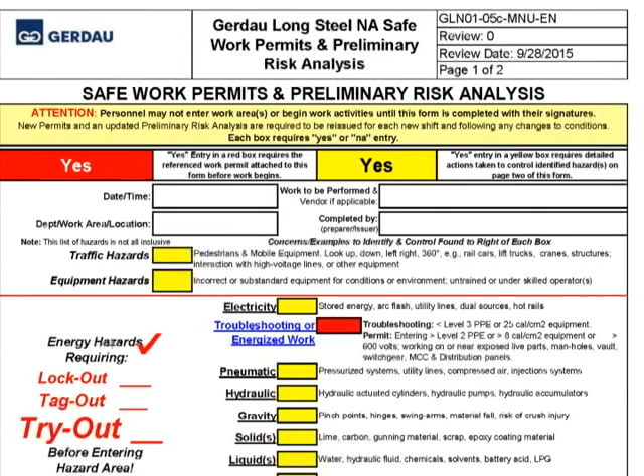During the hazard identification process, consider the tasks people will be performing and whether these tasks could impact others. Do the following hazards exist? Traffic hazards: look up, down, 360 around to identify pedestrian hazards or risk to others. Pedestrian safety is a key focus for Gerdau. Contractors are required to remain within the designated walkways whenever walking within a Gerdau facility.

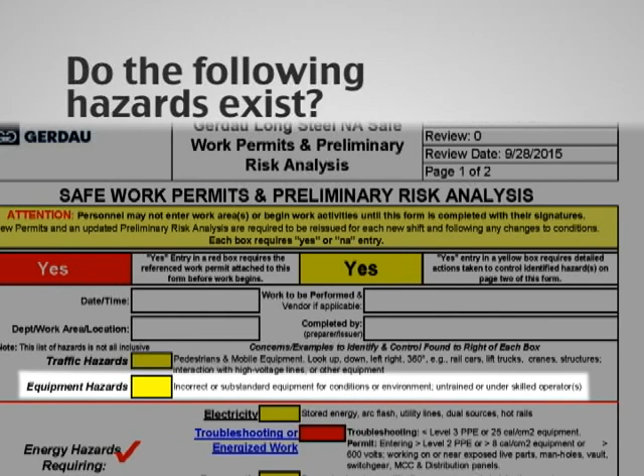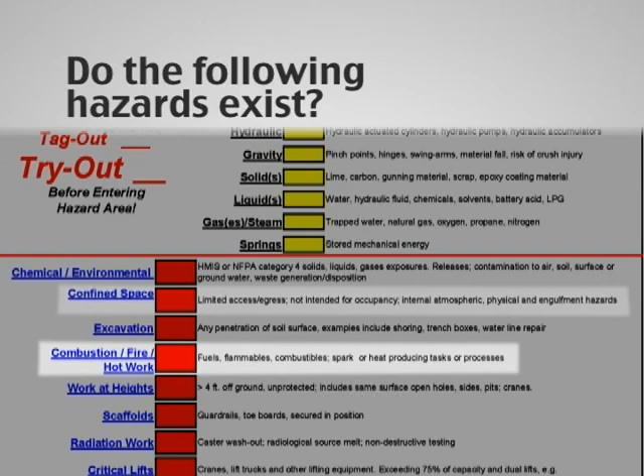Equipment hazards: is the equipment in good working order, compliant to Gerdau standards, and are all operators properly trained? Energy hazards, including electricity, pneumatic, hydraulic, gravity, steam heat, springs, and fuel. Chemical hazards, confined space hazards, fire hazards, and fall hazards.

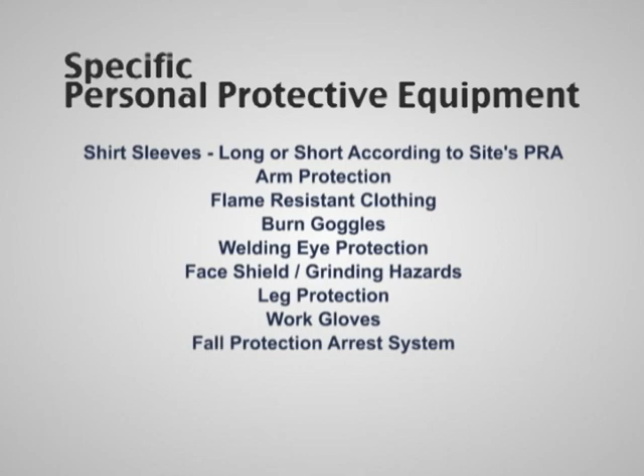We next review the specific PPE requirements for the task: blue hard hat with chin strap, electrician's gloves, safety boots. The styles may be specific; check with the facility for their requirements. Sealed eyewear, shirt sleeves, arm protection, flame-resistant clothing, burn goggles, welding eye protection, face shield for grinding hazards, leg protection, work gloves, fall protection arrest system including fall harness and lanyard.

Dust mask and respirator. The PRA is next reviewed by the contractor and Gerdau persons in charge. Everyone understands their safe work requirements. Everyone knows what to do. Everyone has PPE required. Is it used?

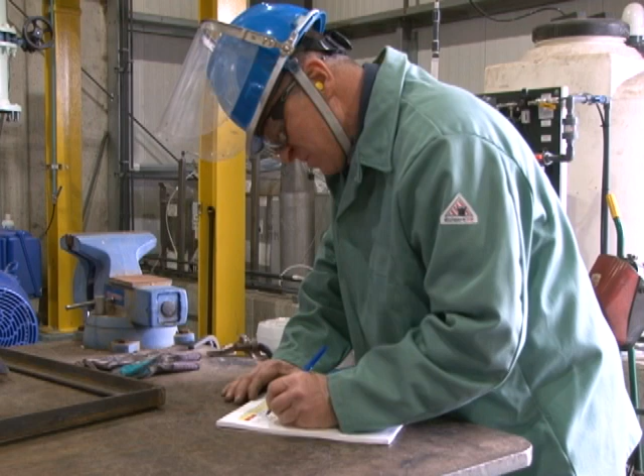Based on the above information, we can now complete the specifics for the PRA. We list the steps for each task individually. Next, for each step, we list its specific hazard or hazards and determine if a work permit is required for the hazard.

We identify other actions to control the hazard and then determine who is responsible for the control. Implementation of the control must be documented before proceeding. The PRA is completed, reviewed, reissued daily, and signed by all parties involved, including contractors, subcontractors, and Gerdau employees.

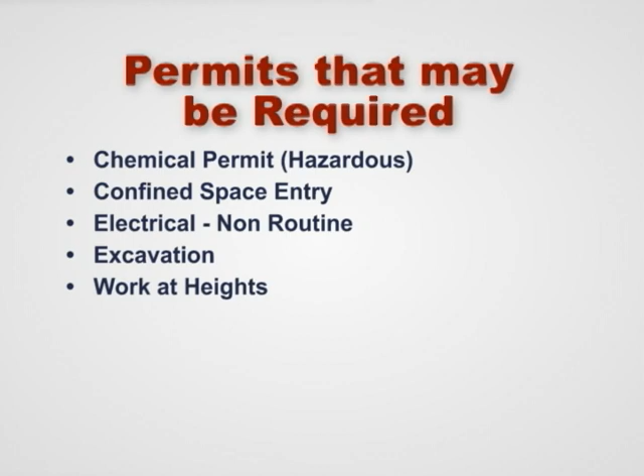Examples of permits potentially required are chemical permit for hazardous chemicals, confined space entry permit, electrical non-routine, excavation permit, work at heights permit, hot work permit, scaffolding, mobile crane or heavy lift permit, and radiation permit.

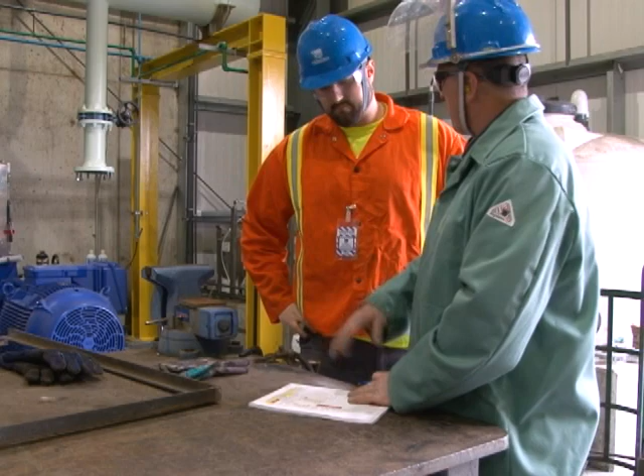The purpose of this process is to ensure that everyone understands the risks inherent in the job and have planned adequate safeguards to avoid accidents and injury before any work takes place. This requires communication among all parties on the job, especially the Gerdau and contractor project managers.

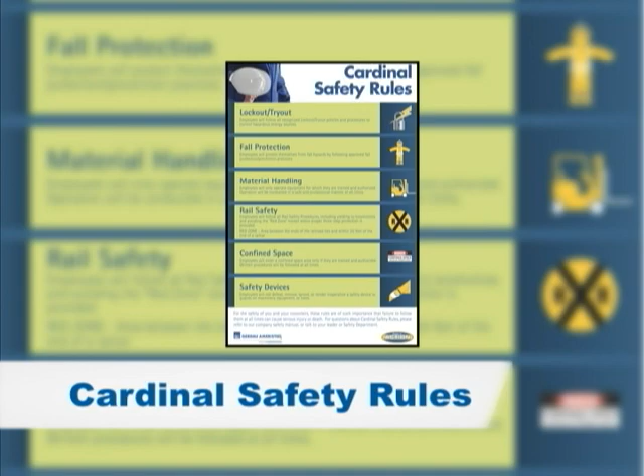Gerdau feels so strongly about the importance of certain policies in keeping you safe that they have designated those as cardinal safety rules. There is zero tolerance for serious and/or intentional violations of our cardinal safety rules.

Violation of a cardinal safety rule will result in the immediate removal of the contractor employee. Project engineer or project coordinator and location safety manager will determine appropriate sanctions to include one of the following: warning letter, notice of suspension, company probation, company suspension, company barring.

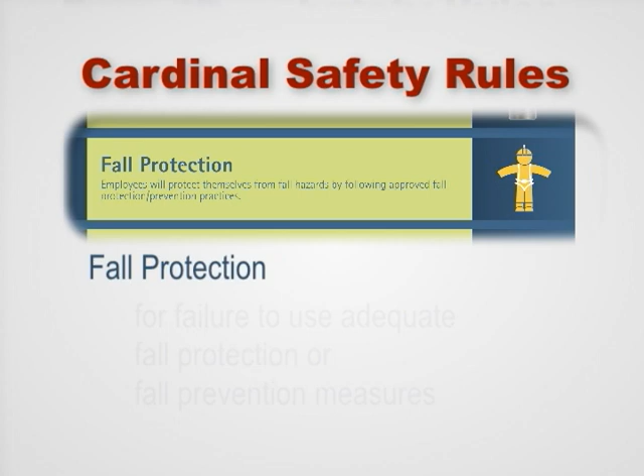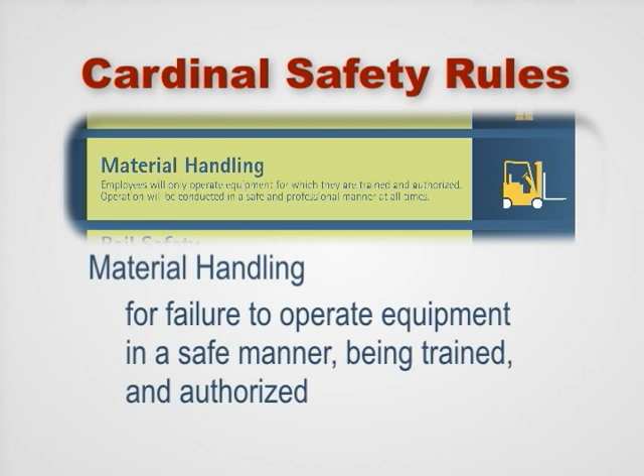Cardinal safety rules include lockout-tryout for failure to follow lockout-tryout procedures, fall protection for failure to use adequate fall protection or fall prevention measures, material handling for failure to operate equipment in a safe manner, being trained and authorized, rail safety for failure to follow rail safety procedures, stopping for locomotives, and violating the red zone.

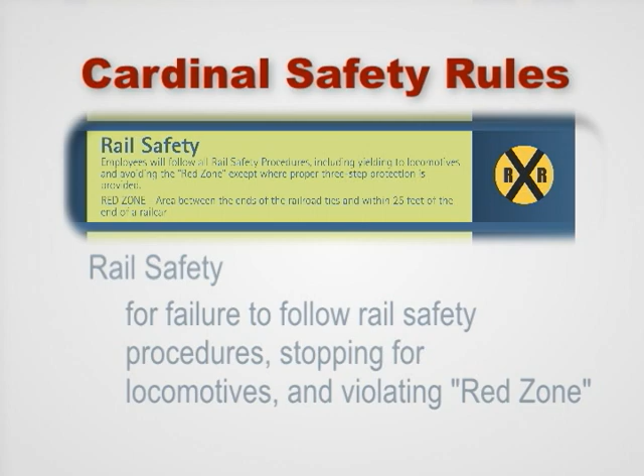Confined space for failure to follow confined space procedures. Safety devices for failure to follow lockout, tagout, tryout for defeating, ignoring, or rendering inoperable safety devices.

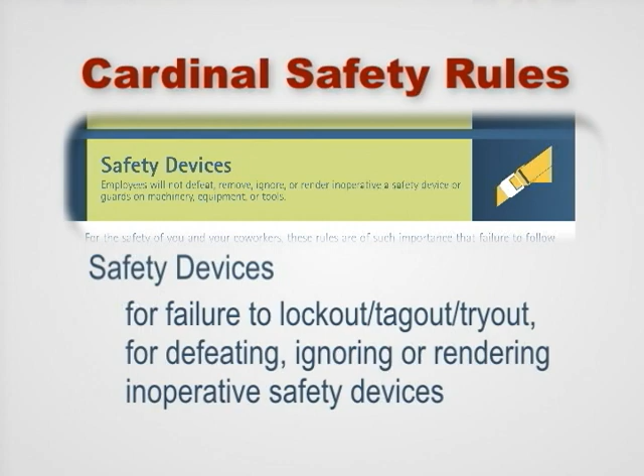General safety rules include: follow all standards, instructions, signs, warnings, and rules. Always ask if you are unsure if something is unsafe. Only trained and authorized employees may operate equipment or enter restricted areas. Only perform tasks after all risks have been adequately evaluated and controlled.

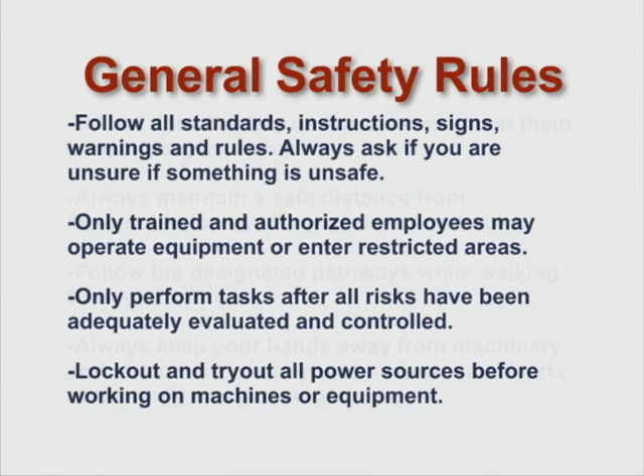Lock out and try out all power sources before working on machines or equipment. Do not defeat safety devices and maintain them in operating condition. Always maintain a safe distance from suspended loads, lifting devices, and hooks.

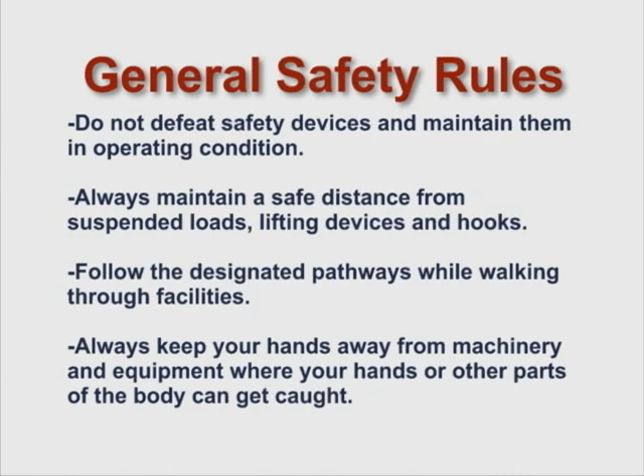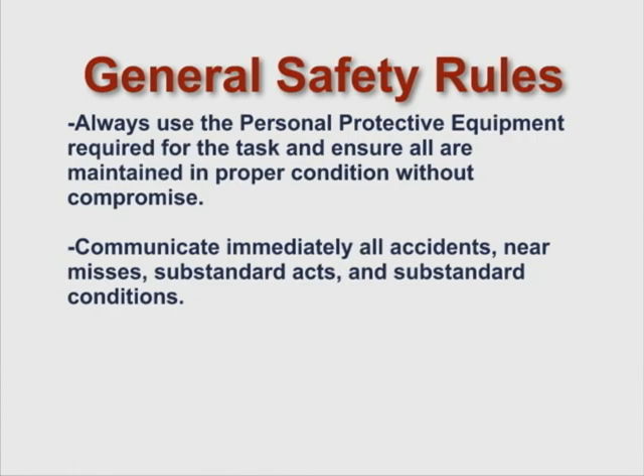Follow the designated pathways while walking through facilities. Always keep your hands away from machinery and equipment where your hands or other parts of your body can get caught. Always use the personal protective equipment required for the task and ensure all are maintained in proper condition without compromise. Communicate immediately all accidents, near misses, substandard acts, and substandard conditions.

Additional general rules: Personnel may not work for more than 16 consecutive hours. Personnel must have at least 8 hours of rest time between when the contractor stops working and when they report for the next shift. Personnel may not utilize cell phones, music devices, etc.

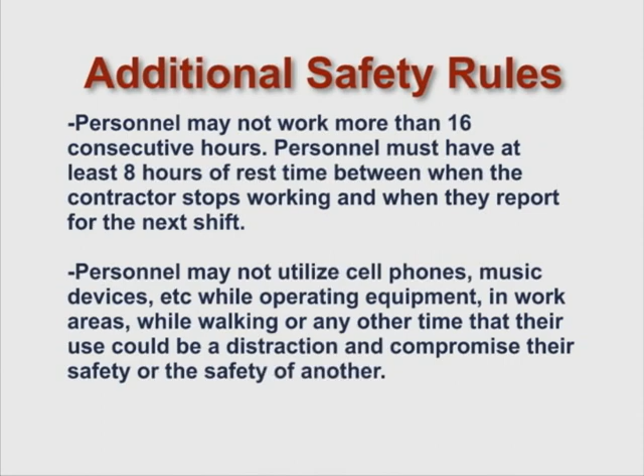while operating equipment, in work areas, while walking, or any other time that their use could be a distraction and compromise their safety or the safety of another. Personnel must be medically fit for duty when arriving on site.

Never enter areas outside of your designated approved work area. Remain in your work area. Taking pictures or videos is not permitted without Gerdau's permission.

Maintenance on contractor vehicles while on Gerdau property is outside of the SOW and not permitted. Scrapyard and slag operations areas are off-limits unless escorted by your Gerdau contact. Never work alone.

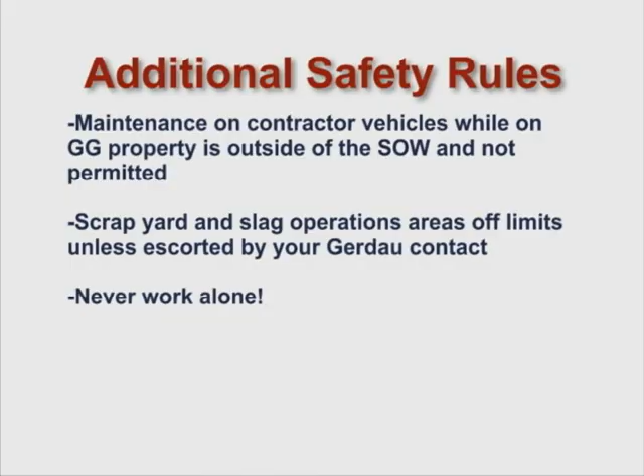Unless you have been authorized by your Gerdau site contact, do not make any connection to operating electrical, gas, oxygen, water, pneumatic, hydraulic, or process lines. Do not turn on or off any of these utility lines.

Gerdau has a lockout, tagout, tryout policy to protect you from the accidental startup of machinery. After the completion of the daily project safety review, all contractors and subcontractors must proceed to the affected area to complete the necessary equipment lockouts using the Gerdau-provided lockout-tryout procedure.

All contractor employees are required to participate in this process, and each must individually apply their lock or locks to the equipment or group lockbox. Always review the control of kinetic energy in motion and potential energy stored with your Gerdau representatives.

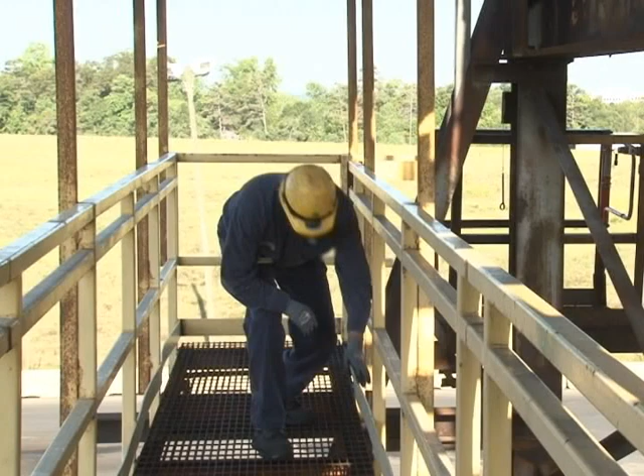Anytime you must place your head, hand, or any other part of your body in a position where you are at risk of being injured by moving or energized equipment, or any time you are required to remove or bypass a guard or other safety devices, you must contact your Gerdau representative to coordinate the lockout, tagout, tryout procedure.

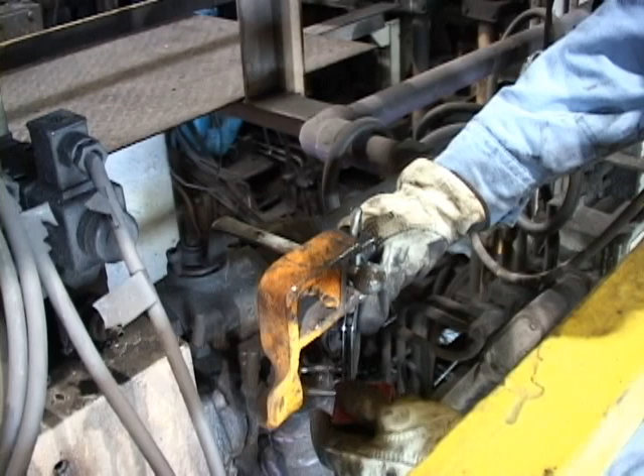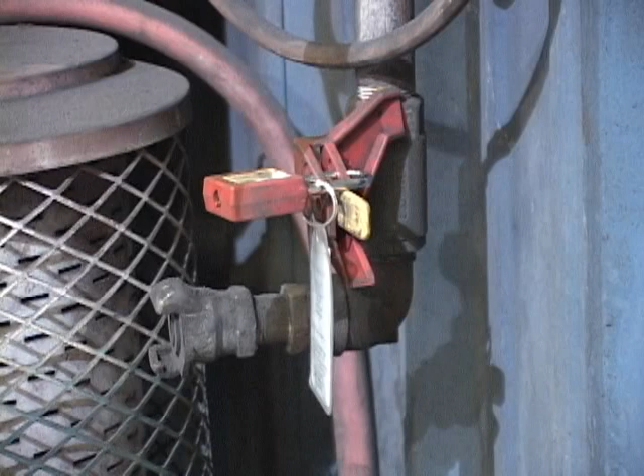This procedure is designed to make sure every source of energy has been disabled, that every employee applies his lock, and that it cannot be re-energized until every employee involved unlocks it. Each lock must be standardized by the contractor and contain a label or tag identifying the contractor firm name and

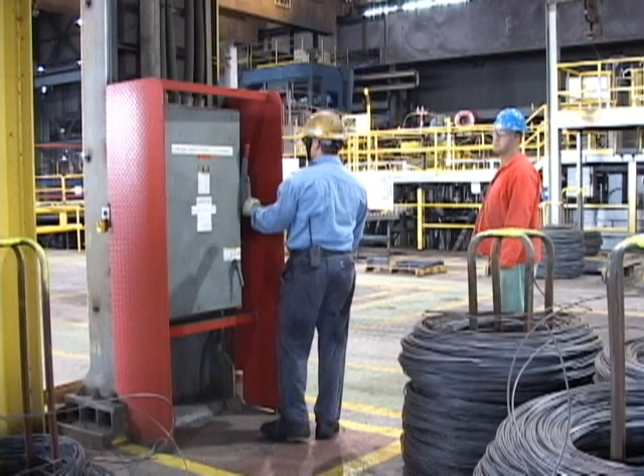employee's name who applied the lock. Contractors are not authorized to shut down, stop, or de-energize any plant equipment or machinery. A qualified Gerdau employee must do this unless an imminent danger situation exists.

If you see someone's lock on a piece of equipment, leave it alone. That person is the only one allowed to remove that lock. You must receive formal training and certification on lockout, tagout, tryout before participating in this program. This training is provided by your employer.

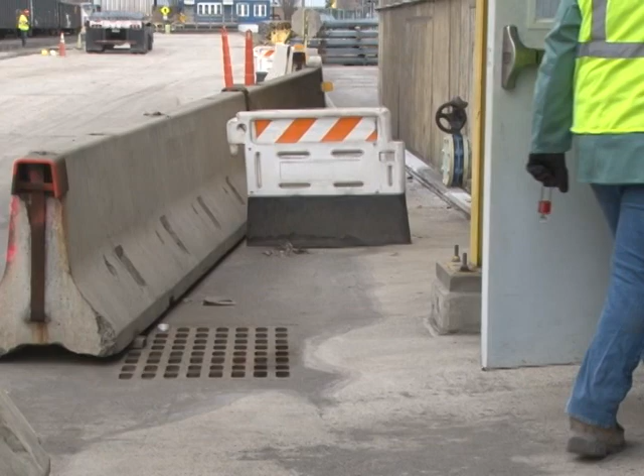Do not leave the site with your lock still in place. This could cause tremendous inconvenience for your company and Gerdau if we had to track you down to start up the machine.

It is Gerdau's policy that you wear fall protection equipment whenever you climb 4 feet above the ground, unless the area is surrounded by a permanent stationary deck with properly equipped guardrails, or you work in a man lift or scissor lift, or anytime you work off a ladder over 4 feet above the ground and you are not able to maintain a 3-point contact, or when you work over 4 feet deep pits or basement openings.

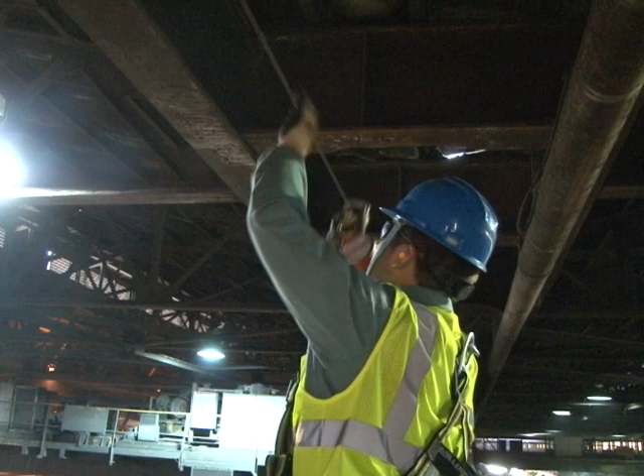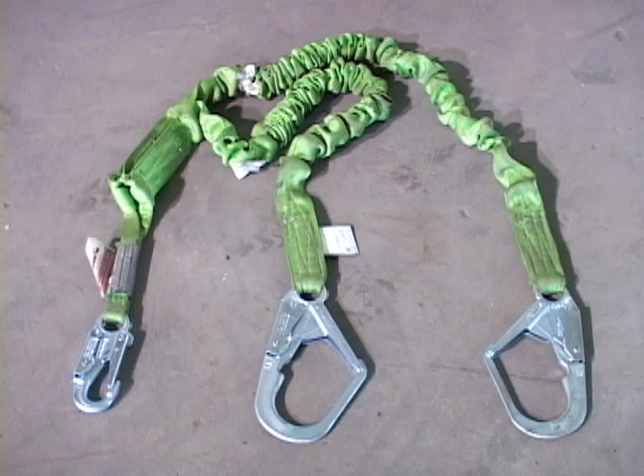Acceptable fall protection includes a full body harness and shock-absorbing lanyards or self-retracting lifelines, referred to as SRLs. The lanyards must be tied off to a structure capable of supporting 5,000 pounds for each person attached. 100% tie-off is mandatory. You may be required to wear a dual lanyard. Fall protection belts may be used for fall restraint.

The use of forklifts as man lifts is strictly forbidden unless properly fitted with an approved engineered man basket. Contractor personnel must receive adequate training before working at heights. Gerdau does not provide either the equipment or the training for implementing any contractor's work at heights program that may be required to perform the contracted work. Both are the sole responsibility of the contractor.

You must be adequately trained and receive certification to use mobile equipment. Inspect and document your fork truck safety devices and all operational systems prior to use each shift.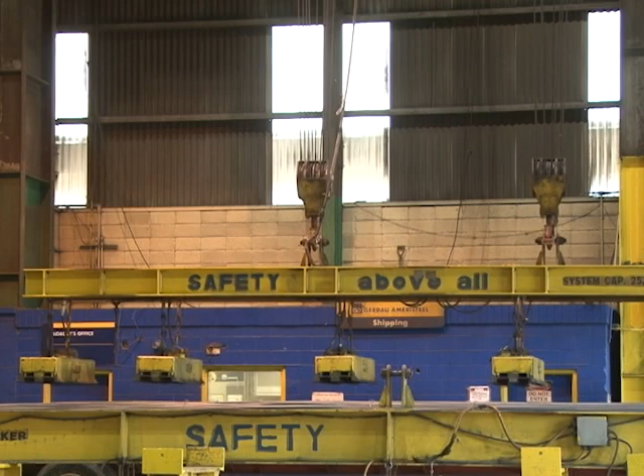You must be trained and qualified to operate a crane by your employer. Do not stand or walk under loads suspended from cranes or the empty hook of a crane. Listen for the siren, horn, bell, or other signaling devices that signal the approach of a crane. Keep all parts of the body clear of lifts while tension is being applied.

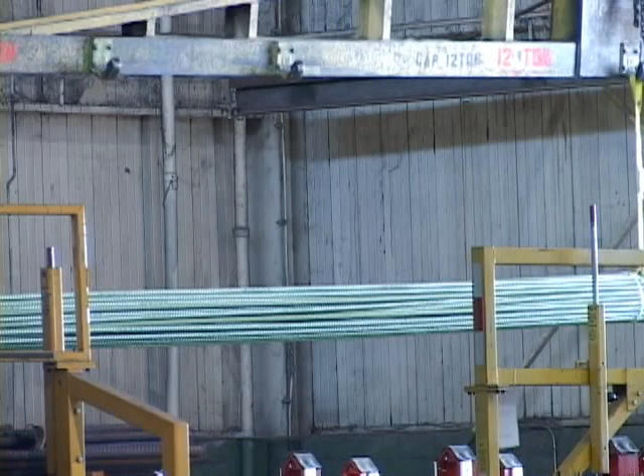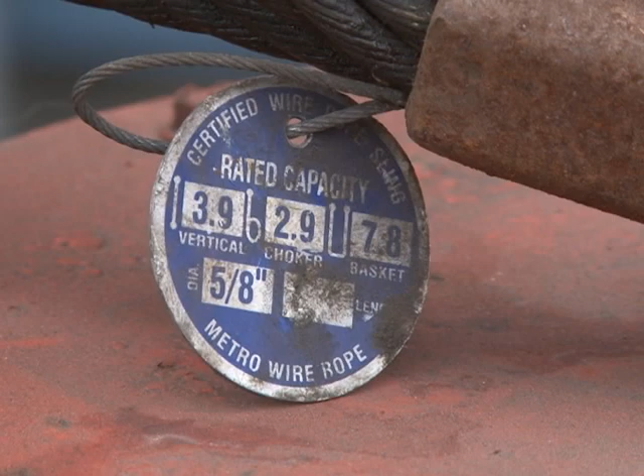All cranes used on site must be inspected regularly, including daily operator pre-use inspections and annual inspections. The crane must be certified to operate. All rigging equipment must have permanently affixed identification from the manufacturer and be inspected prior to each use. You must be both trained and authorized by your employer in safe rigging practices.

Safe rigging practices shall be adhered to at all times. Always be certain of the weight of the load prior to performing any lifting operations.

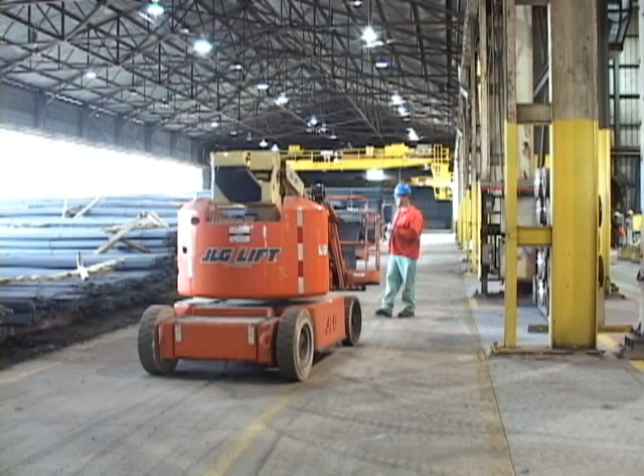You must be adequately trained to use a boom lift or scissor lift. You must be tied off to the floor or mid-rail anchor point while wearing a self-retractable lanyard before performing work. You must lock out the bay if there is potential contact with the crane, hot rails, or below-the-hook devices.

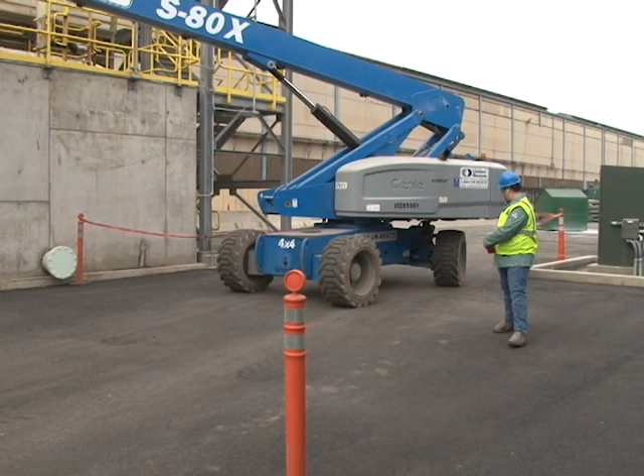Inspect and document your aerial equipment safety devices and all operational systems prior to use each shift. Use of an aerial lift at a Gerdau facility requires a spotter to escort the lift during movement. The spotter must always be visible to the equipment operator and provide assistance with clearances and pedestrians that may be in the equipment's path. When the aerial lift is stationary, the area below must be marked with cones and/or caution tape to prevent pedestrians from traveling under the work area.

Aerial lifts can be used directly over pedestrian pathways, provided the necessary precautions are taken to close off the walkway and provide a temporary, safe pedestrian route.

Riding on locomotives, rail cars, or other transportation equipment is prohibited except when required by your job. Do not crawl or climb over or under cars. Only drive across railroads at the crossings provided for that purpose, and only after coming to a complete stop.

Always park vehicles or equipment a minimum distance of 10 feet out from the center line of any railroad track. Only walk across railroad at designated walkways. When crossing a track with standing cars, maintain a minimum of 25 feet clearance from the end of the car in case of sudden movement.

Contractor employees will not defeat, remove, ignore, or render inoperative a safety device or guards on machinery, equipment, or tools.

Contractors cannot perform any work for Gerdau unless a PRA and associated permits have been completed. All employees working on the project must review and sign the PRA. Then it must remain with the persons conducting the work.

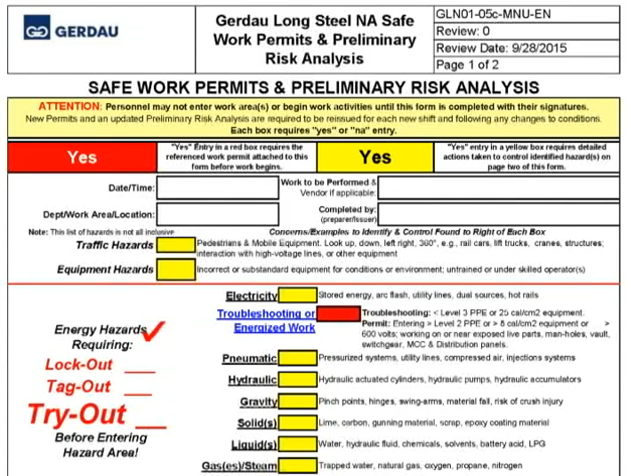If work task hazards or scope change, stop work and meet with your Gerdau contact to update and discuss with the crew. Completing the PRA and associated permits require a thorough analysis of all of the hazards inherent in the job at hand. The contractor is asked to identify any hazards that may become present, including exposed electricity, excavations, toxic substances, and poisonous atmospheres.

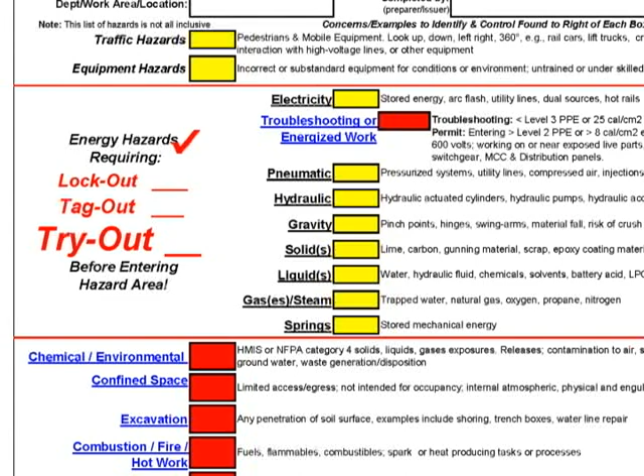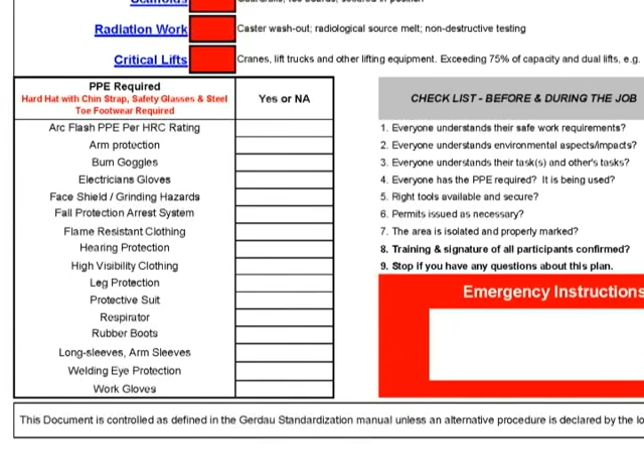The pre-task safety checklist section requires an evaluation of your need for protective equipment such as gloves, face shields, and safety glasses. Work is not authorized until the PRA is completed and signed.

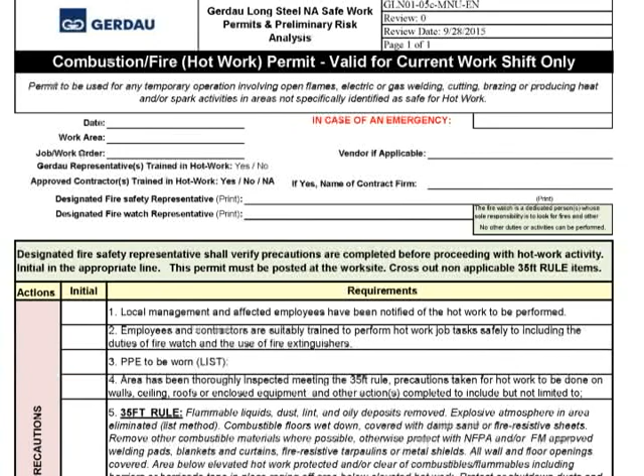Associated permits such as confined space entry, energized work, hot work, excavation, etc. may also be required depending on the scope of your project and as determined when completing the preliminary risk assessment.

Anyone working on Gerdau property must not be under the influence of or in possession of illegal drugs or alcohol. Your company may have its own testing program to include random or annual testing.

Any contractor who refuses to submit to a drug and alcohol test or who tests positive for drugs and/or alcohol will be removed from work at any of our sites. No weapons of any kind are to be brought onto Gerdau property.

If you are involved in or observe an accident, injury, or even a near-miss incident, you are required to report it immediately to your supervisor and the Gerdau representative. Also, report any hazardous conditions you encounter during the course of your work.

You must report all injuries to our representative, no matter how slight. Do not use any Gerdau equipment. If our equipment is required, we will provide an operator, or the contractor company must complete and meet the Equipment Hold Harmless Agreement.

Where there is danger from moving machinery or equipment, proper protective devices such as flags, signs, signal lights, derails, rail clamps, or watchmen shall be provided.

All contractors must wear ANSI-approved hard hats at all times in designated hard hat areas. They must be blue hard hats with chin straps. You must wear safety glasses with side shields at all times.

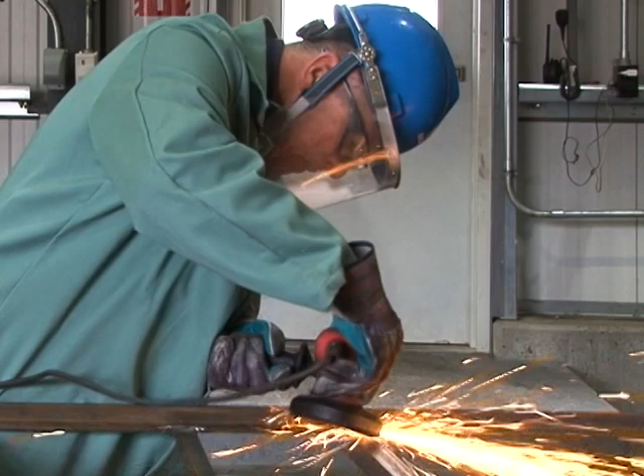Wear a face shield if you are performing any grinding, chipping, burning, spray washing, or similar tasks. Use only those welding hoods that attach to the hard hat or are usable while wearing a hard hat. Anytime you are working on our property, you must wear protective safety steel-toed boots that come above the ankle.

Specific hazards may necessitate special protective footwear such as rubber boots or boots with metatarsal guards. You are required to wear gloves around any operation that presents a hazard to your hands. You must wear special hand protection when working near chemicals or high-voltage equipment, and at other times when safety conditions call for such protection.

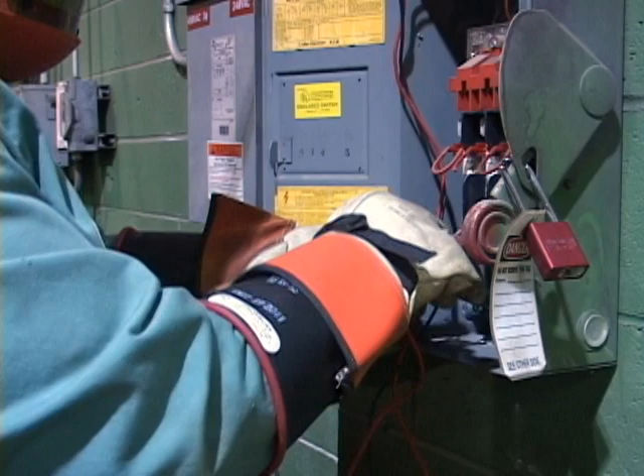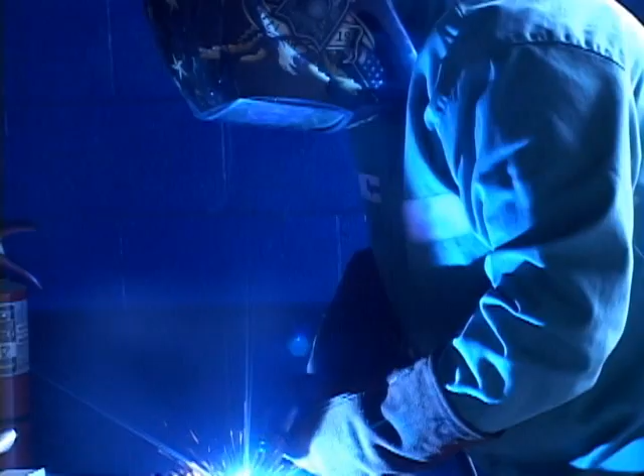Long pants and long-sleeved shirts are required when working on site. Your clothing must be in good repair and conform to the requirements of the working area. Flame-retardant clothing must be worn when in the mill.

Don't wear oil-soaked or grease-covered clothing. If you are working around open flames or molten metals, don't wear nylon, polyester, or other synthetic materials, even as undergarments. You may be required to wear respiratory protection whenever the occupational exposure limit is exceeded.

Before you put on a respirator, you must have medical approval and fit testing. You are not permitted to wear jewelry, including rings, chain bracelets, or necklaces. And in case of emergency, an ICE hard hat sticker and hard hat insert should be worn instead of a medical alert bracelet.

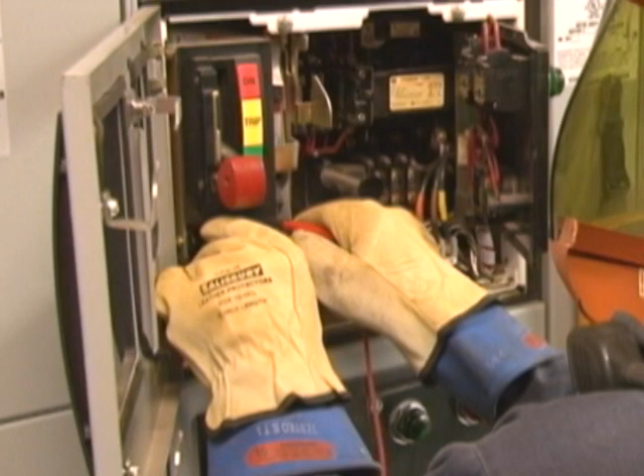In the United States, if you are going to be working around live, high-voltage circuits, your flash protection must conform to the NFPA 70E standard. If in Canada, please refer to your Ministry of Labor guidelines for your province.

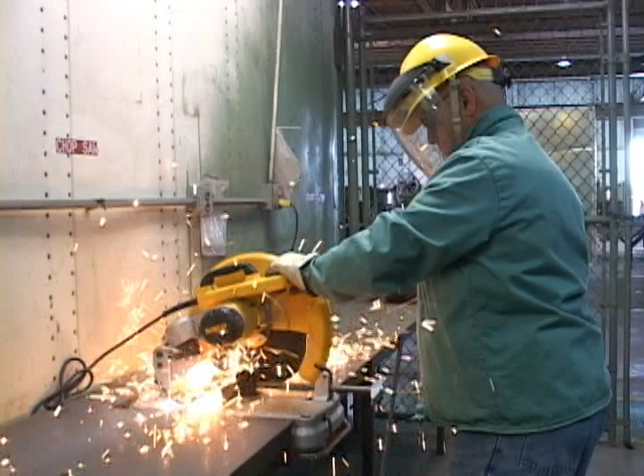Depending on where you are working on plant property, hearing protection may be required. Signs have been posted in high-noise areas to warn you to wear hearing protection. You must also wear hearing protection whenever equipment such as jackhammers, pneumatic wrenches, and saws generate noise levels exceeding 85 decibels, in the form of moldable earplugs or adjustable earmuffs. Ask your supervisor for hearing protection if none is immediately available.

Enter Gerdau property only through the designated gate. Park personal vehicles in designated parking areas only. Parking of personal vehicles on streets and in or around buildings is prohibited. You must sign in and out with security or designated point of entry each time. All contractor vehicles entering or exiting our property may be subject to search.

Obey the posted speed limit and traffic signs. Heavy mobile equipment and material haulers are constantly on the move and have right-of-way. Pedestrians are constantly crossing the roadways. Remain alert.

Proper housekeeping is one of the key elements for a safe and healthy workplace. Substandard housekeeping also indicates a lack of job pride and performance. Store all materials in an orderly fashion in the designated areas where the work is to be performed.

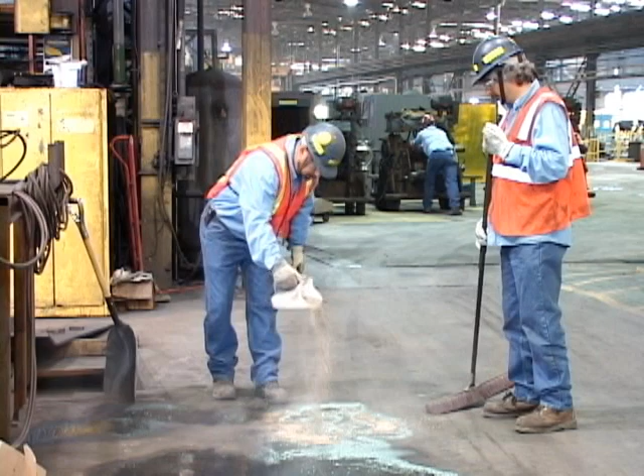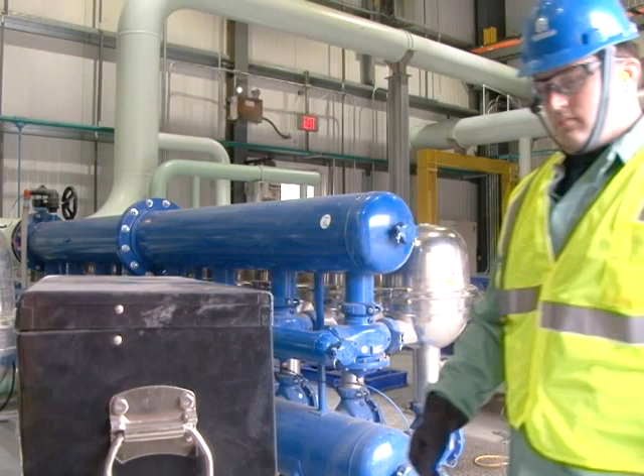Clean all spills immediately and report all spills to your Gerdau representative. Store all tools and other equipment in proper locations when they are not in use. Contractors are required to provide their own tools required for the scope of work.

Any deviations from this requires the permission of Gerdau site personnel, and in the case of Gerdau mobile equipment, the Hold Harmless Agreement must be in place. Keep stairs, steps, ladders, and walkways clean and free of materials that might cause tripping or slipping. Contractors are solely responsible for properly disposing of all waste generated by them on a daily basis.

Make sure that all your electrical equipment is properly grounded and in good repair. Use ground fault circuit interrupters with all portable electric tools. Trigger locks on portable electric tools are not allowed. Worn, frayed, or spliced electrical cords or cables must be removed from service.

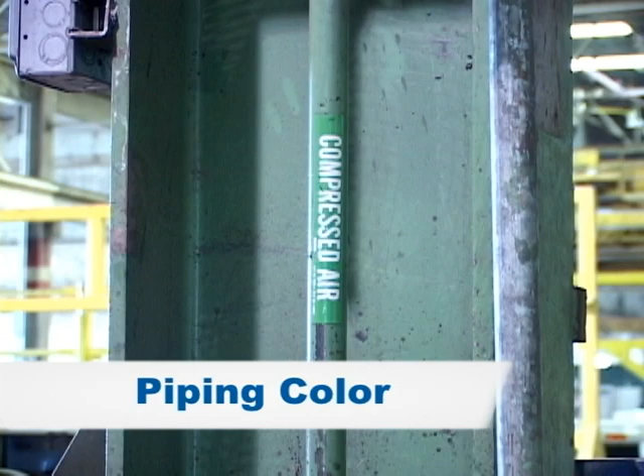The contractor is required to become familiar with any piping he may be working around to ensure proper identification of such piping. If the contractor is unsure of piping, naming of pipes, or color coding, he must obtain clarification of said piping before performing any work.

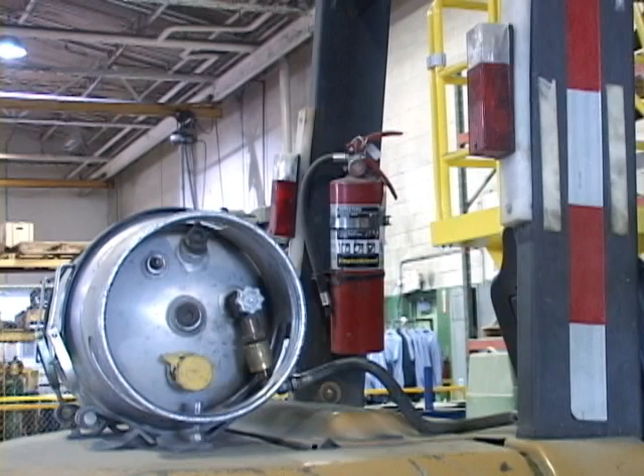Become familiar with the locations and use of portable fire extinguishers located in your work area. Each company vehicle and all powered equipment must be equipped with appropriate fire extinguishing equipment. Notify our safety department if you must take any firefighting system out of service.

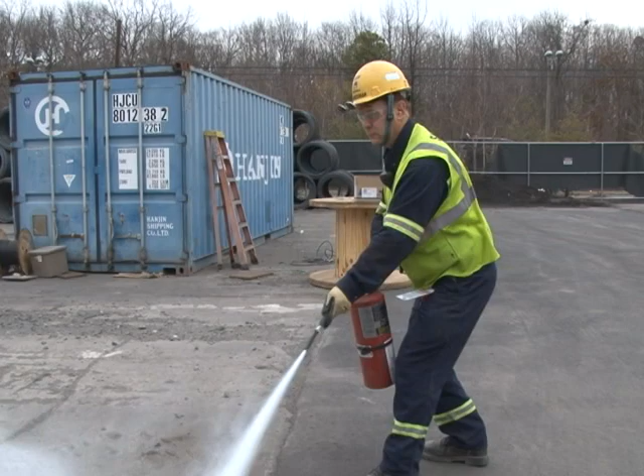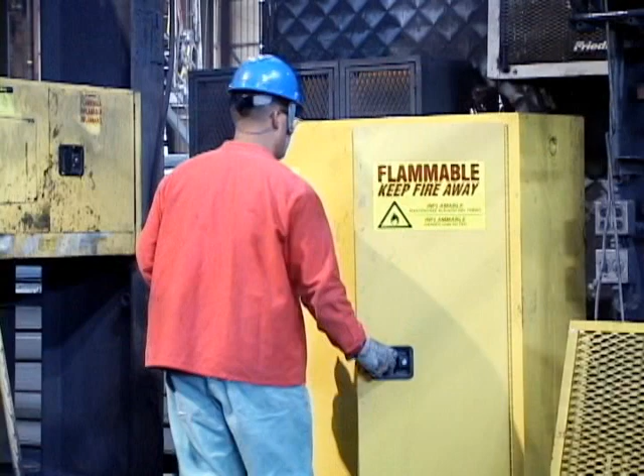If you have received fire extinguisher training and feel comfortable doing so, attempt to extinguish a small fire with a fire extinguisher. Report the incident to your site contact, the department supervisor, or any member of our management team. In case of a large fire, warn personnel in the area to evacuate, then contact the on-site emergency contact.

Keep all flammable refuse in proper containers. Store flammable liquids in fireproof containers. Properly secure all compressed gases cylinders.

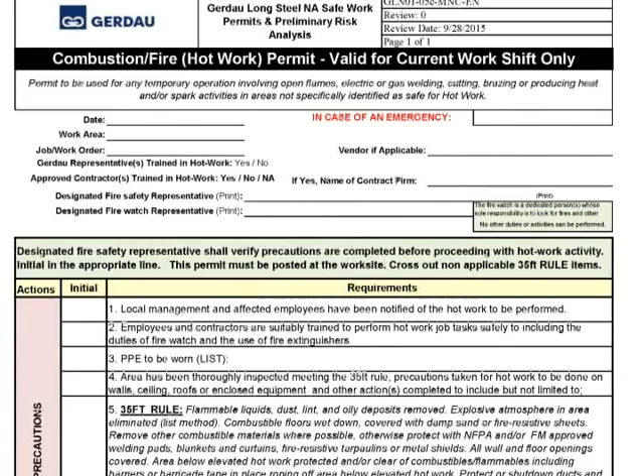Before using a cutting torch or welding, complete a hot work permit and have it signed off by your site contact. Obtain permission from your site contact before using any temporary heating devices.

For safety, several areas in our plants have been designated no smoking areas. Ashtrays or sand pails are provided in areas where smoking is permitted. Smoking materials shall not be thrown on the ground or floor of the work area or anywhere on site. Do not use or carry matches, propane or butane lighters on your person in PPE-required areas. Never attempt to use a cutting or welding torch as a lighter.

Contractors performing work at our plant must provide a complete list of all substances or chemicals they will bring onto plant property. Contractors must maintain SDS sheets on site for any chemicals and materials they will use. Contractors must provide our representative an SDS before any hazardous substance may be brought onto the site. Properly label and identify all containers.